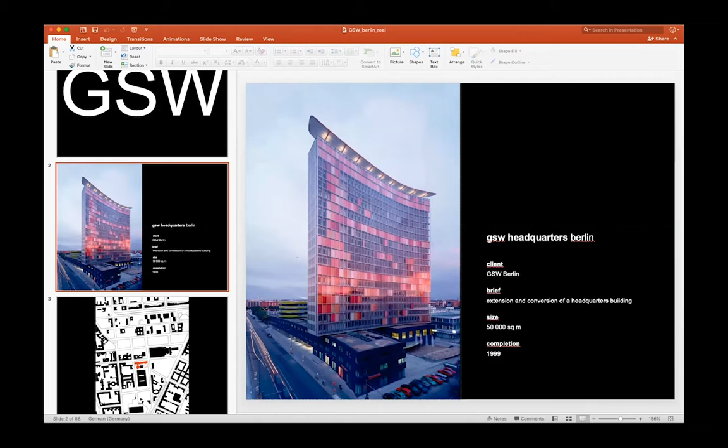Matthias, I think you're stuck. This building in the center here. I'm sorry, we didn't hear your last sentence. Can you see the mouse? If you can do the slideshow on your PowerPoint presentation, that would be helpful. So we see only the slide you want to talk about. What do you see at the moment? We see the whole presentation. Ah, I see, okay, that's not intended, sorry. Is that good now? No, that's not good. Maybe double click the image you want to show. Is that good? You see, it doesn't matter, let's leave it like that.

Anyway, so we were extending an existing building that was built right after the war. It was meant to be a headquarters for a printing house for a newspaper editor in what at the time was still called Kochstrasse, the Fleet Street of Berlin before the war. This was a reconstruction effort which went badly wrong because it was completed in early 1961, and as you know, in August '61 the wall was built. So the building was right up against the wall, and it became a major player in the Cold War. There was a kind of messaging board mounted on top of it, so messages could be blasted across to the east.

Our proposition was to make an addition to this building. At the time, 1990, this was at the end of the IBA period. IBA is the International Building Exhibition in Berlin, which was all about the so-called critical reconstruction of the historic fabric. We are in the middle of what's called Friedrichstadt, the center of Berlin - the southern part ended up in the west, and the northern part, Mitte, was then part of the east. The debate around IBA was about the continuity of European typologies, both in urbanism and architecture. So it was all about the block as far as Berlin is concerned.

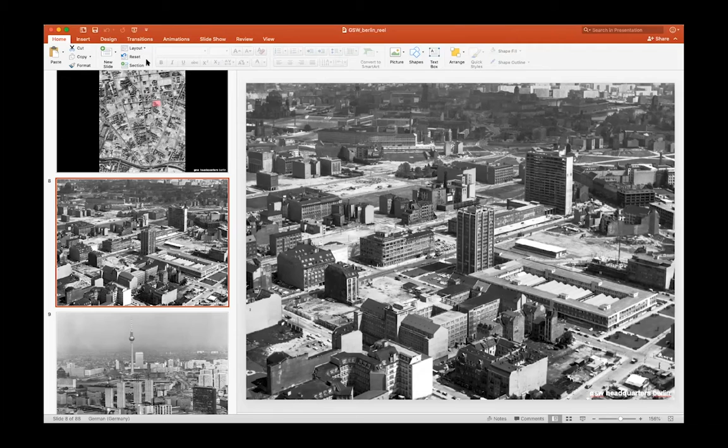This is a photograph from the time when we were doing the competition. To come back to this diagram, what we were proposing is to pick up elements of different periods that had left traces on that site and in that area. Namely, the 18th century scale, which is more 3-story buildings with mansard roofs. So that's what's being picked up by this horizontal building, a ground scraper that follows the line of the block, even though it bends in a little toward the entrance.

And there's this, what on this diagram is a green object we lovingly call the pillbox, which comes up to the scale of the 19th century, the 22-meter line in Berlin. That was the building rule, that buildings could not have a parapet higher than 22 meters due to fire regulations. And then finally a new building flanking this 1950s tower, with its aspiration of Berlin being a new modern center of Europe, all of that before the wall was built. And this is what it looks like today.

So that's one story, this kind of repair of the city, the city as a palimpsest of different layers of historical ideas about the city, its urbanism, its architecture. And the second story, and Zvi was already hinting at it, is to do with sustainability.

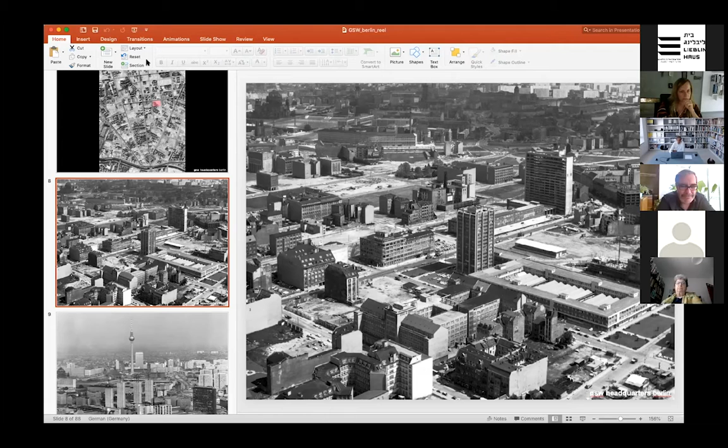You don't see the images? No, we see only the first image. This one you don't see at the moment, the color? No, oh how strange, we see the historical photo. We're still in the first image. Sorry, okay. Let me disconnect you for a moment. Sorry. No, share screen.

So Zvi, you often take your students to this area when you are in Berlin, right?

First of all, of course, because this is the very important IBA area, and all the interesting experiments of this IBA, all the disasters maybe one can say, are exactly in this area. So this building is not exactly part of IBA, but immediately after, it really stands out as maybe the most significant building of Berlin in the 90s, or the last decades of the 20th century.

This would be Berlin's iconic building. It looks nothing like those postmodern blocks around it. And it's quite amazing because it was the first significant building of a very young firm at the time, Sauerbruch Hutton.

Yes, now we see it. Is that okay? So this would be the winter period. This would be in the summer. In a way, the idea is that it's a kinetic facade which responds to the climate, in this case to the sun. But there's more to it. It's also a double facade. This is a diagram from the fluid dynamics simulations at the time.

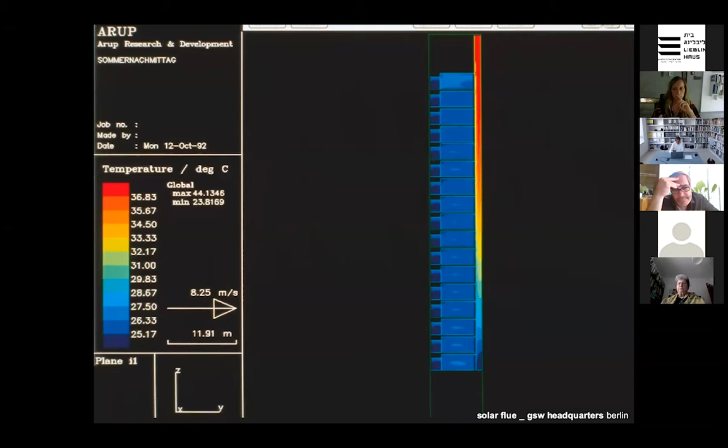We had to prove the fire rating and the fire concept in general. You can see how there's a very narrow facade that goes all the way up the building, where the air heats up, and there's pretty amazing convection within that, like in a chimney, which drives the ventilation. So when you open the window on one side of the building, and the window on the other side, you open the window into what we call a solar flue.

You create a cross draft which pulls air through the floor slab and through the offices, providing a kind of mechanical ventilation entirely without any mechanics, just opening windows. Basically, it's based on natural convection. At the time that was a total prototype, and part of the reason why the building took so long to realize. It took 9 years to be built.

But it's a concept that is working very well and is still being employed today, at least in the intermediate seasons like spring and autumn. At the moment the summer is so cold that it's also probably being used.

But when it gets very hot, there's also a cooling system in the building, but it's based on evaporation of water, so it's not very powerful, but there's some cooling, and there's night cooling. The building can be flushed with fresh air through the night through this system, and you can see the floor slabs are exposed, so the concrete gets charged with cool air over the night.

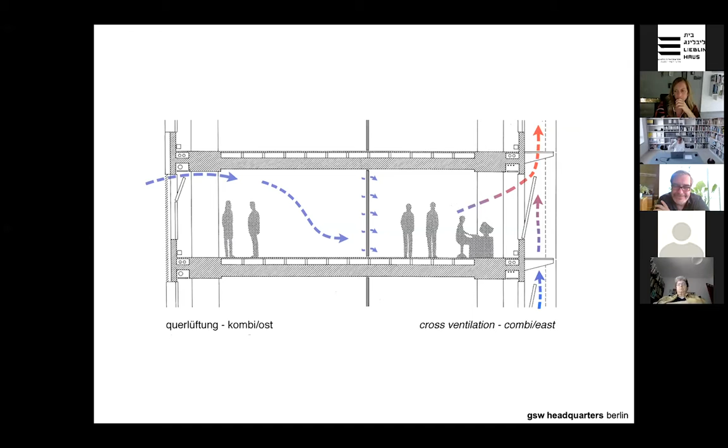So Matthias, there's a problem with your microphone. Okay, can you hear me now?

Yes, sorry, as I was just saying, the floor construction, you can see it here. It's made of prefabricated elements which span the whole width of the building. It's only about 11 meters wide, and the gaps were used to put all the installation that you needed, the sprinkler systems and electricity and all of that.

But let's put this in context. It's basically at the time when you were looking at the life cycle cost of a building, we calculated that the construction of the building was only worth about 15% of the overall energy requirement needed to keep a building for 60 years well used.

And as city planners and architects, there was a lot to do. Just to connect it to our topic for today, the day after tomorrow, I think that perhaps starting with this kind of project in the 90s is a little bit similar to the zeitgeist we are at right now, where we have to think how architecture responds to this era, in the moment in time where it happened.

One has to explain that this really happened at a moment when Berlin was super elated. I happened to be in Berlin on the very day of the 9th of November 1989, when the wall opened, and that night, that week, and the following two years or so, were just so optimistic. It was an unbelievable mood in the city, and everybody thought, including hard-headed clients, that Berlin would be the center of Europe, a great capital, and everything would be changing. Somehow everybody felt whatever we do now, we have to really contribute to this future.

And that's how something like this project became possible at all, because Berlin is anything but known for its experimentalism—at least post-war, there's not that much experiment going on, except for special events like the IBAs. That a normal housing association would commission an architect to do a building like that, and then stick through this choice and be loyal to us for nine years—the economy was going up and down, the optimism was waning—it was exceptional, really unusual, pretty impossible to think something similar would be happening today.

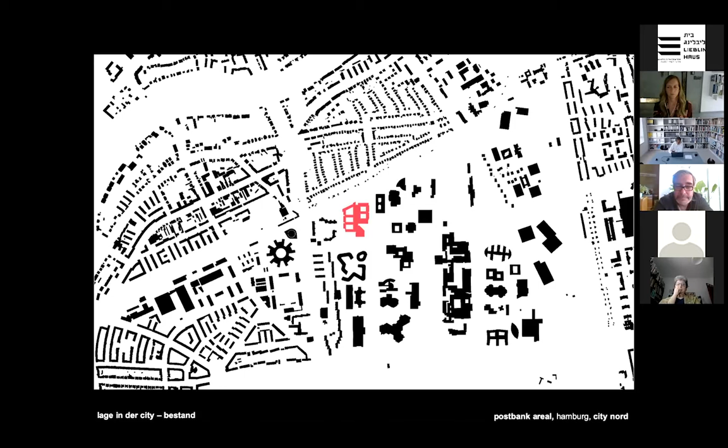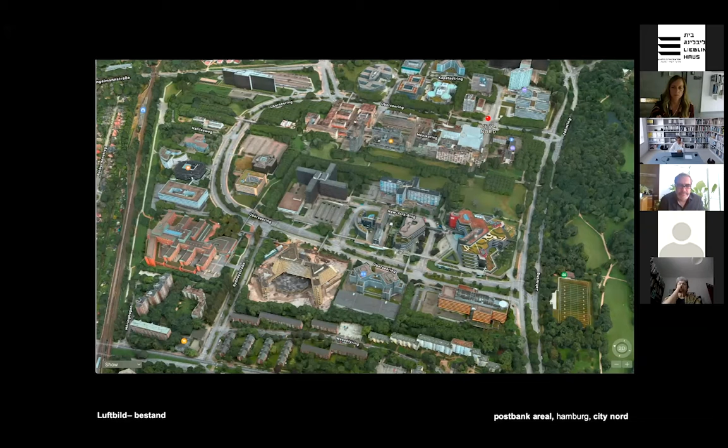We were asked to take part in the competition for this comb building here at the bottom left, this brick thing, which was built for the Postbank, the savings bank of the German Post, once a state organization. It was a logistics center where they had their computers printing out bank balance statements and whatnot—an administrative building, but enormously big.

You can see here it was like 70,000 or 78,000 square meters, and we were supposed to extend it. We were supposed to take it down and rebuild it with something that was 96,000 or nearly 100,000 square meters. Of those 100,000 square meters, 77,000 were meant to be office building, and in the existing structure there were 32,000 square meters of office building. So essentially, they were asking us to take down offices that were not even 40 years old, maybe 36 or so years old, and replace them with new office buildings.

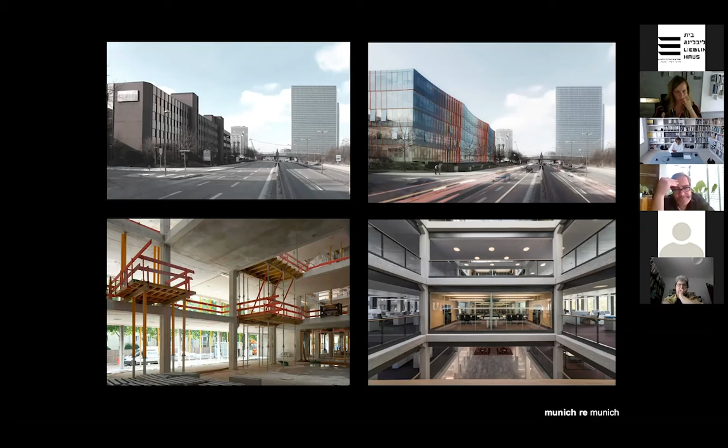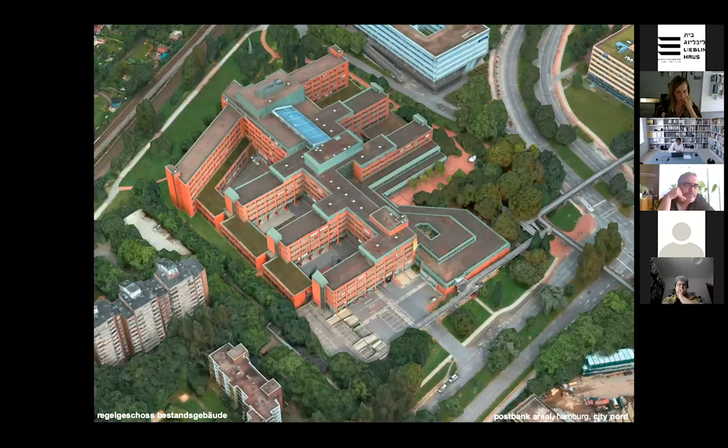And having had that experience, we kind of looked at this building that we were supposed to be taking down and replacing with a new office building as something that we should possibly exploit for its existing qualities.

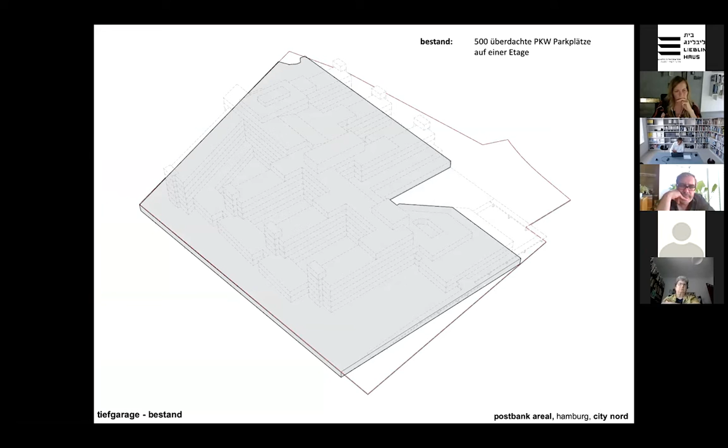So we proposed to our client not to take it down entirely, but first of all to keep all or most of the underground garage, which is absolutely enormous, and convert half of it. We'd leave approximately two-thirds of the existing building standing, optimize the circulation within, and extend it with timber construction, which is light enough that the existing concrete frame could take the additional load.

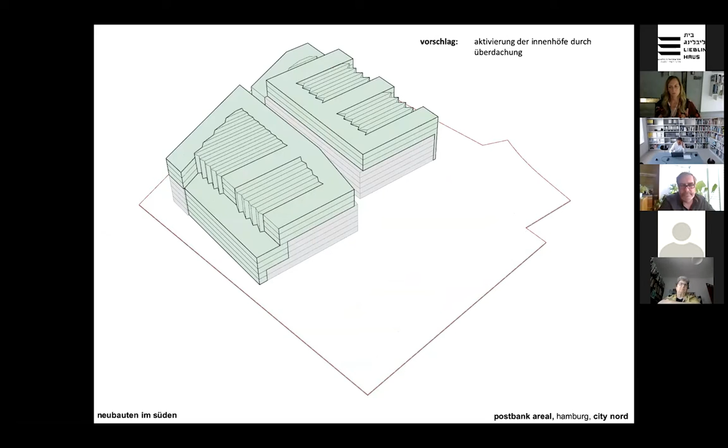And this was this kind of story about the gray energy saving that I was just telling, that we were obviously introducing here as well.

And then we proposed to add one new office building, which we wanted to build in the timber hybrid structure, or we still want to do that. And there's a residential component to the whole program as well.

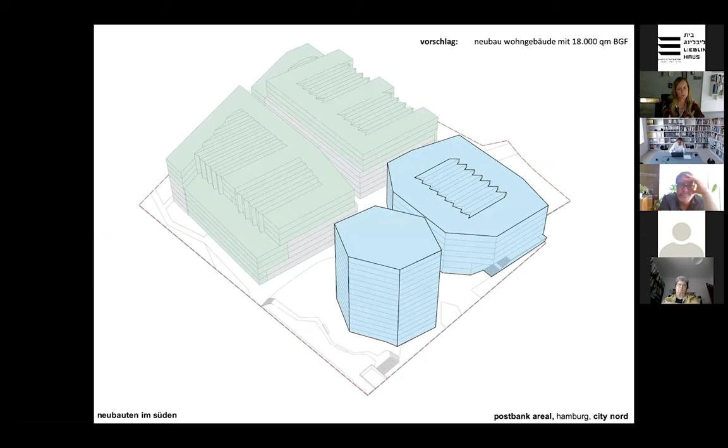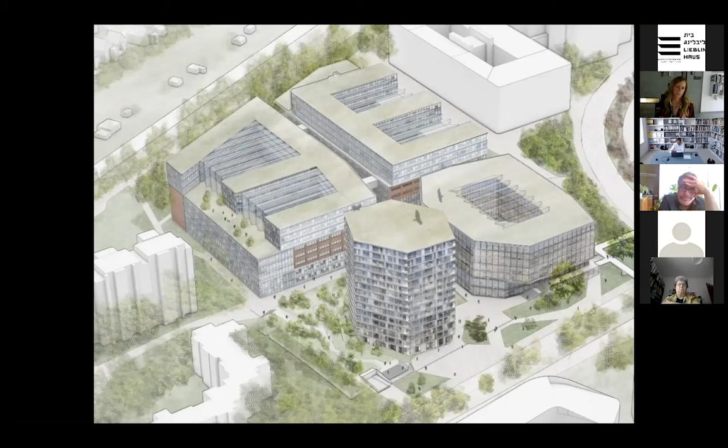And so in the end you have a complex that's quite large, it's 100,000 square meters, as I said. It's almost like a small piece of city, like a small quarter, which carries these layers, even though we're just talking about one or two generations, really. It carries these layers of architectural intervention.

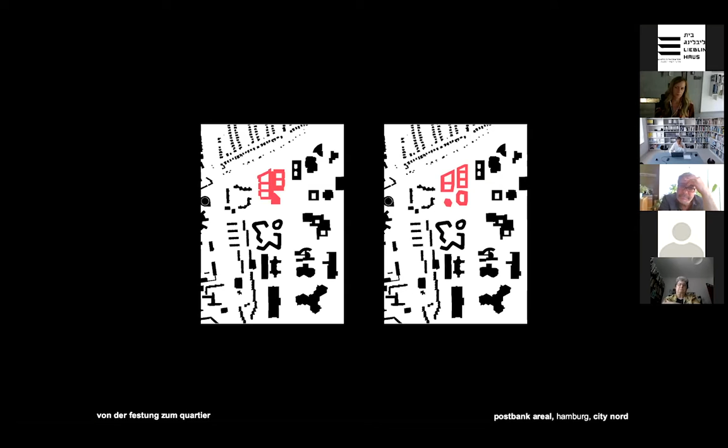And at the same time, as a side effect, it kind of opens up. You can see here in the footprint, the original one was very much designed as one institution, almost like a Fort Knox type, with central control, central access, and so on. We are opening this up and dividing it into different office elements and different kinds of working environments.

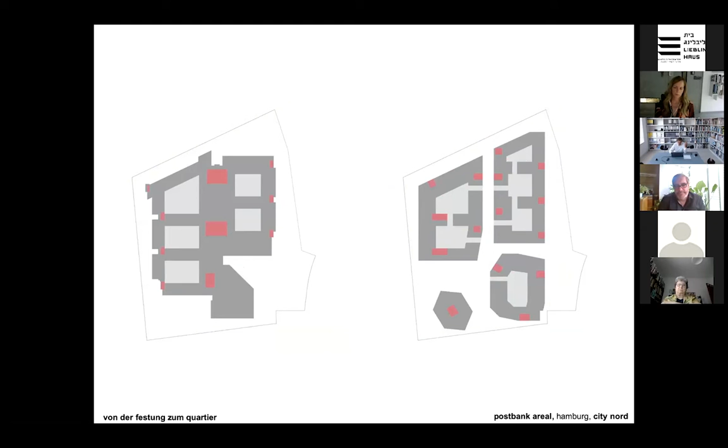And there's obviously a public component with restaurants and stuff like that, which will make it attractive, at least for people in the surrounding buildings as well. As it happens, there's a shortcut path to the next S-Bahn station, to public transport. So it's kind of en route for quite a few people who come to this strange agglomeration of what they call themselves Elephants in the Park.

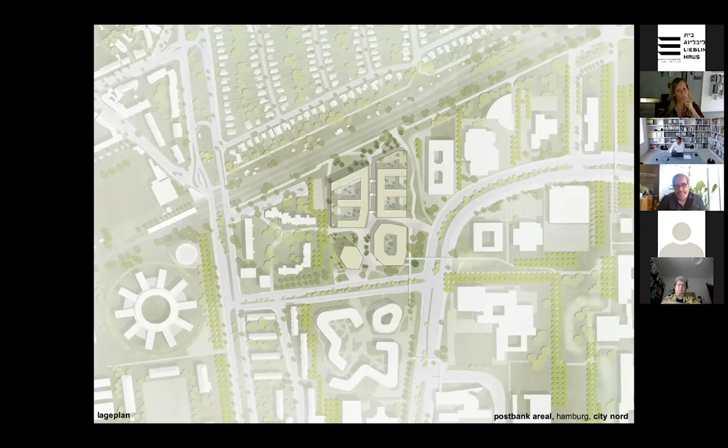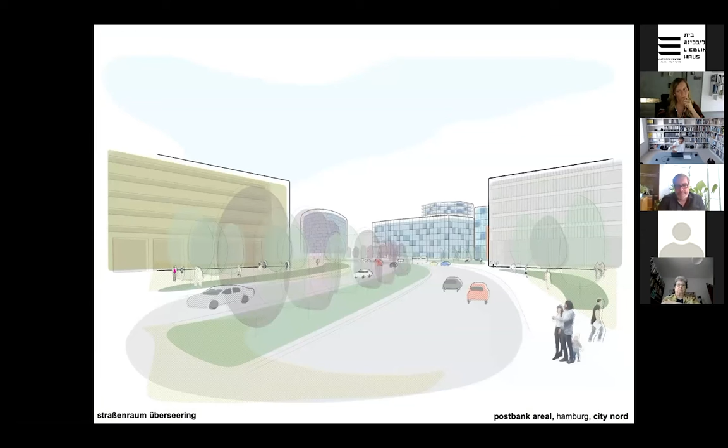There's also a certain spatial logic here which we're following, a certain scale, and also a certain mise en scène, if you like, a spatial sequence we're trying to fit into. They have a little hedge built along the street, which is almost acting like a little model to the urban proposition. It's quite funny in a way.

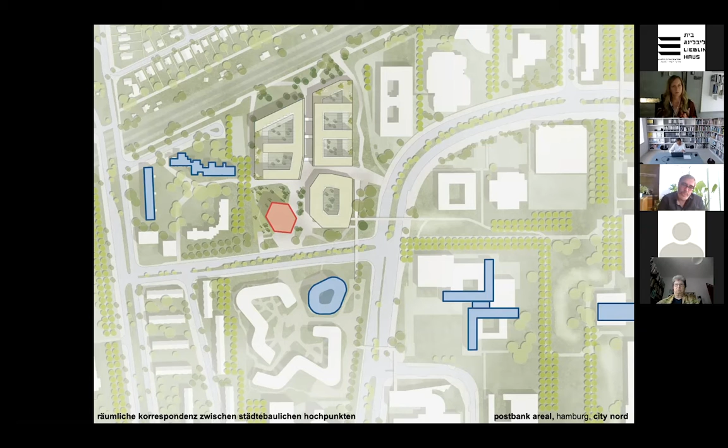And we're trying to pick up approximately the scale of the neighbors, and there are these objects, this kind of housing as well, housing towers, which create certain clusters or certain lines that start to make a coherent composition, even though they open a very landscapey field.

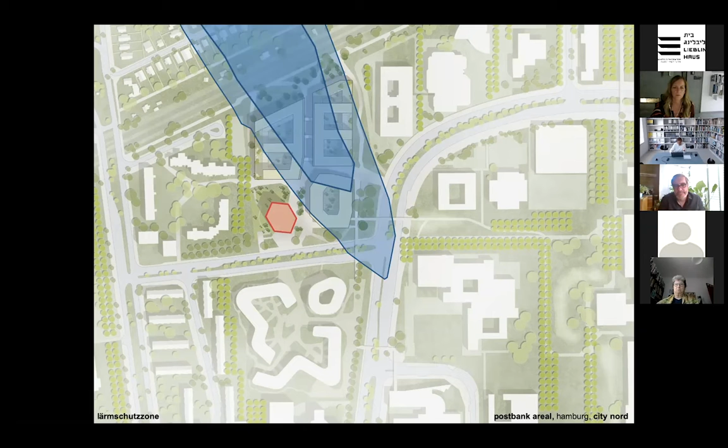It's also very close to the airport, which is a great advantage in terms of circulation and mobility, but it also makes a lot of noise. So we're trying to avoid the worst, covering courtyards and so on and so forth.

Maybe I don't need to explain all the workings of it. Maybe I'll just end up with this image that implies this kind of collage-y quality — we refer to it as wabi-sabi, this Japanese philosophy of beauty which is sort of in praise of the repaired, of the imperfect, of the somehow contaminated.

So it's a kind of 70s building, not the most beautiful, but quite a solid building, which we're extending with this timber component, timber and glass basically. The courtyards are being covered over to protect from the noise from the airplanes, trying to bring a new spirit into this institutional environment that would be more positive towards contemporary working practices.

So I think at this point I rest my case and disconnect again from the screen.

Are you still there? Yes, absolutely. Yeah, okay, let me just find the...

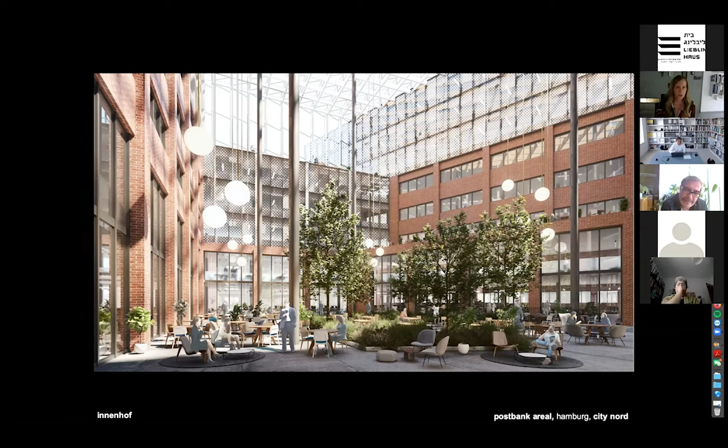So Zvi, do you want to start this conversation after what we saw? Yes.

I think what's so fascinating in what Matthias has just shown us is that he's not even trying to present it as a humble attitude. For him, he takes it for granted. And for me, this is the future of the possible, or the more optimistic future of our profession of architecture. Matthias is there from long ago, from the 90s, from their very first project. They're always interested, above other things, in what should be commonsensical for all of us. This is, I would say, the ethical quality, the ethical architecture as an ethical praxis.

And first of all, to me, as a technical and environmentally sustainable practice of building.

We are for too long seeing, and in Israel it's quite common but also anywhere else, that we are part of the problem, not part of the solution, in the sense that we really participate in this ongoing party of overproduction and overconsumption, which is not only about goods, but also about space. One of the things that happened maybe recently with this epidemic, without trying to foretell the future, but what we can see for sure is that there is a certain warning for us, or a certain feeling that we don't need so much. We overproduce. We build too much. We are bulimic in the way we produce architecture.